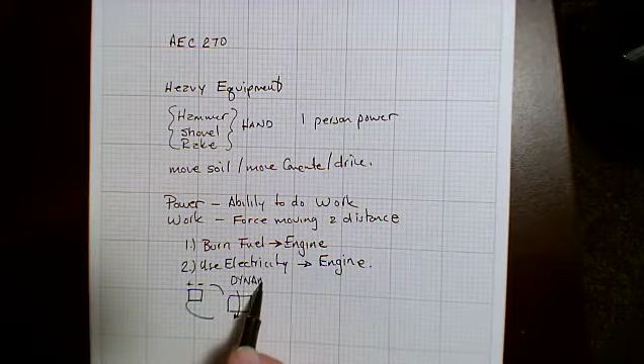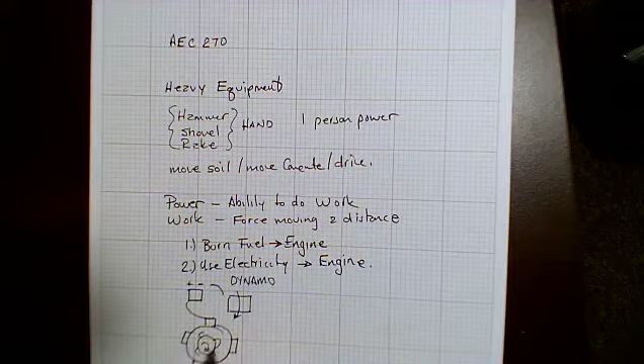We get these two to work, and although we talk a lot about electrical equipment these days and think that it's a new idea, electrical driven equipment has been around for a long time. Many electrical cars took a battery and connected it to a dynamo or a motor, which is a series of magnetic fields that rotate inside fixed magnetic fields and are forced to rotate by the changing current, and we can then drive a shaft.

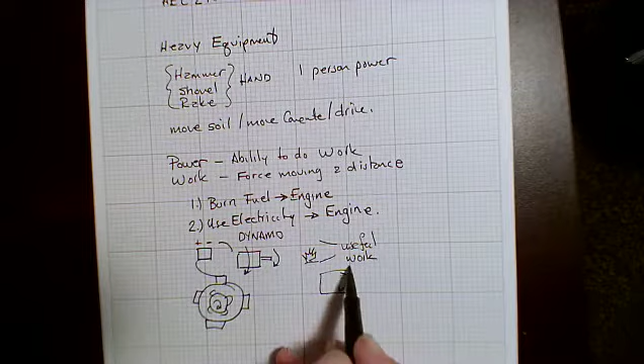Similarly, if we burn fuel, we can then convert that fuel into useful power to turn a motor, whatever that motor looks like, which turns a shaft.

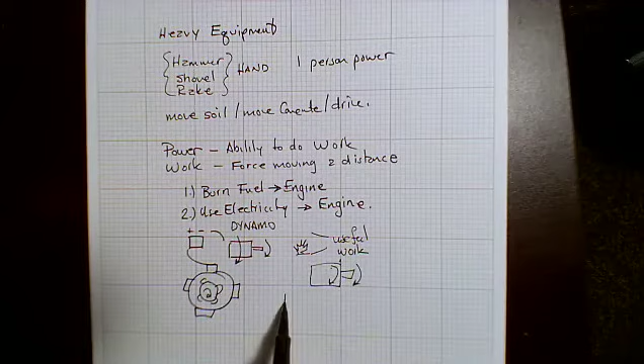Now, we can also use internal and external combustion. In your Suez Canal assignment, they talked about using steam. In steam, we use external combustion. We burn coal or wood or whatever, take that heat, heat water, and use that water to become steam. We take that steam and use it to turn a turbine, and the turbine turns a shaft.

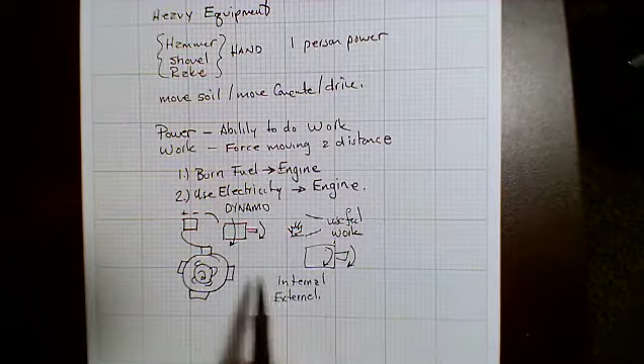In an internal combustion engine, we have a fuel that drives pistons, which turns a crankshaft, and that shaft then rotates. Once we have a rotating shaft, we know how to do all sorts of things with it. We can drive a pump, we can drive wheels, we can drive a pulley or a rack that will wind and unwind a cable. So we can do all sorts of things with this turning shaft, and it has been around for quite some time.

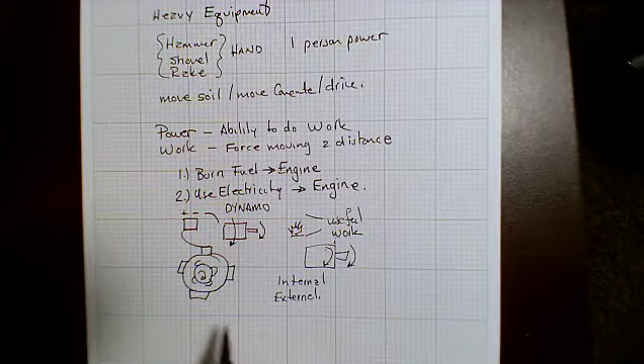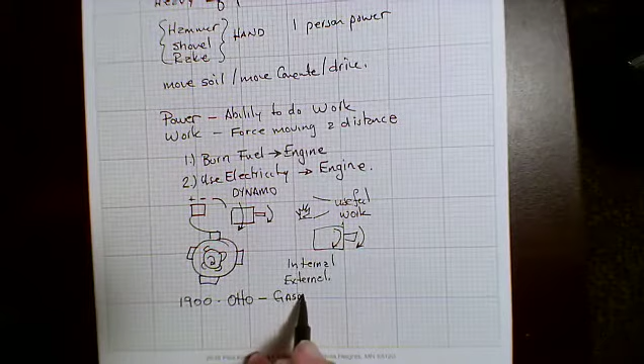In the early 1900s, a gentleman in Germany by the name of Otto developed the gasoline engine, and it was decided that it was too important an invention to simply patent. And so we have gasoline engines that were made widely available nearly simultaneously.

A diesel engine is developed, not surprisingly, by Diesel in Germany. This uses diesel fuel or diesel oil, and it burns that oil in an internal combustion engine, all of which we do to turn a crank.

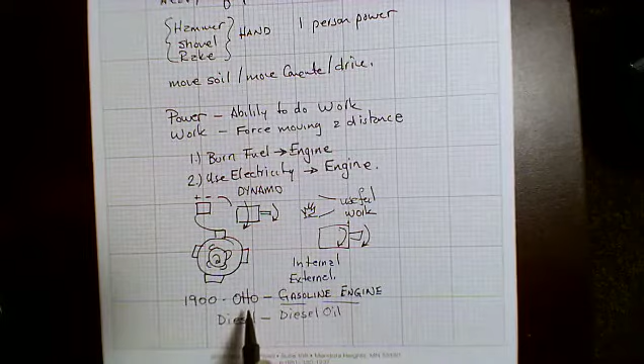At the end of the Second World War, the Eisenhower administration decided that they would build the Interstate Highway System. This was a major expenditure of public funds, and this expenditure required us, as a society, to develop ways of doing construction that were different from what we had done before.

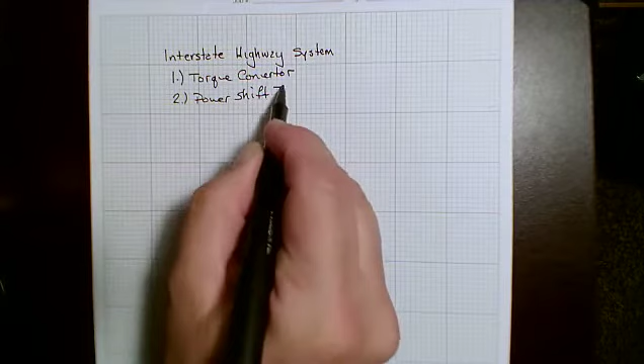We had a number of changes. One is the torque converter, which allowed us to rapidly take power off of a rotating shaft. The second is the power shift transmission, both fortunately developed as a part of making heavy vehicles that could do things during the war.

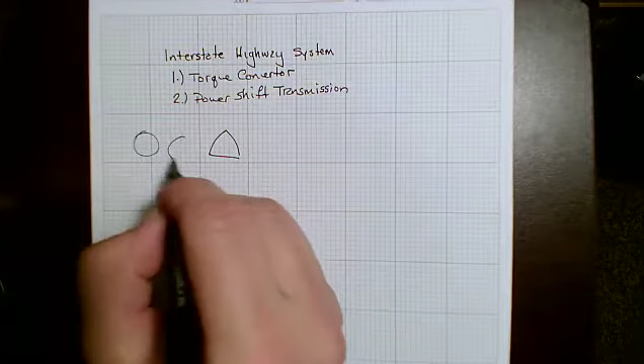These allowed us to have a front end loader, right? So a front end loader, which is something at the front of the vehicle, as opposed to the old dipper shovels, which at the time were the method of using a shovel back and forth. This is much more efficient.

There are three large changes that occur during this time. The first is high strength steel. High strength steel allows us to build lighter vehicles that are just as strong as lower strength steel.

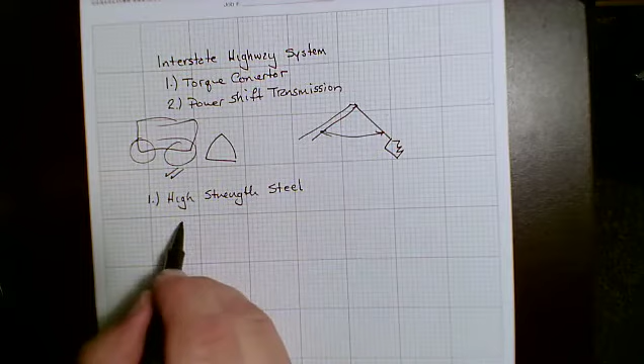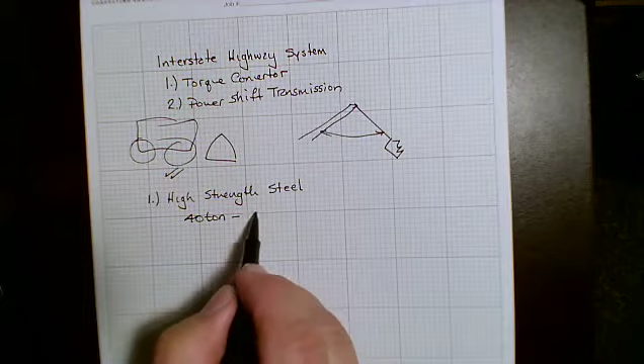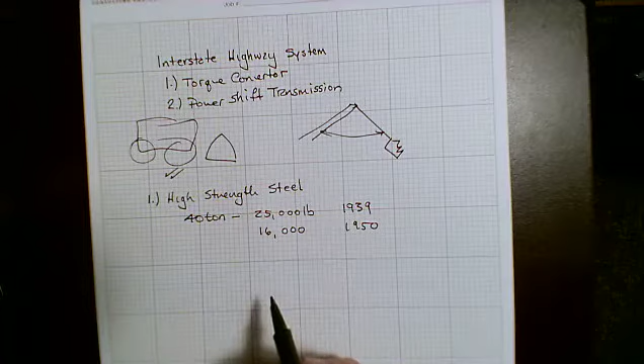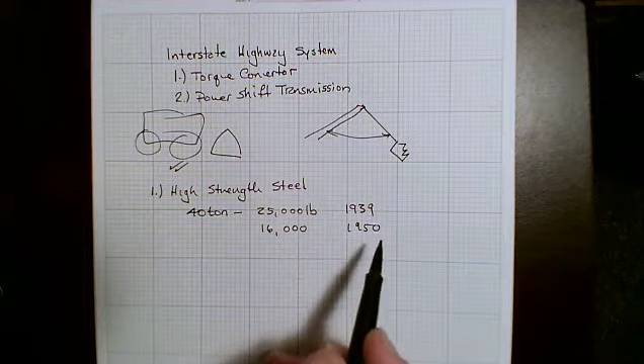As a result, the machines would change, for example, a truck capable of carrying 40 tons of soil in 1939 has a weight of 25,000 pounds. By 1950, the same vehicle, same capacity, has a weight of 16,000 pounds. If you think about the way in which we move things around, this reduction in weight of the vehicle is significant. It means that more power for a given engine is available to move the stuff because you don't need as much to move the vehicle itself.

The second change is nylon corded tires.

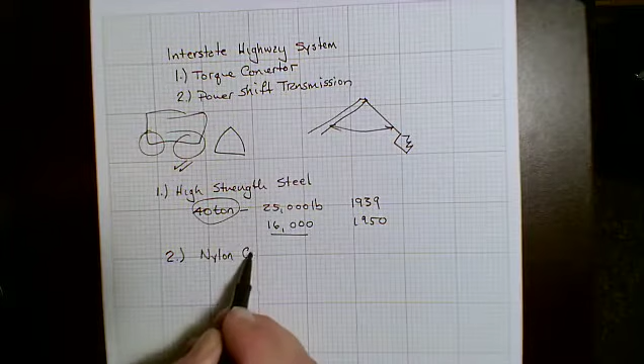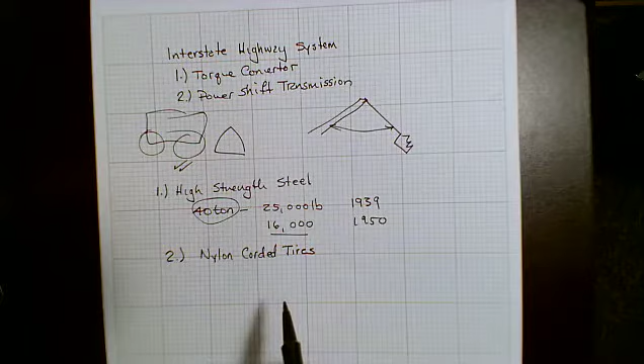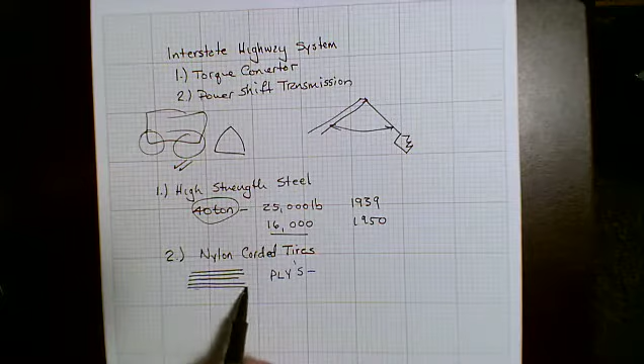Tires are a very important material. We would have a very difficult time if we only used rubber tires, because rubber is very elastic. So what we would do is build many plies, or layers, of rubber into the tire. You've probably heard this in ads, a 5-ply tire is 5 layers.

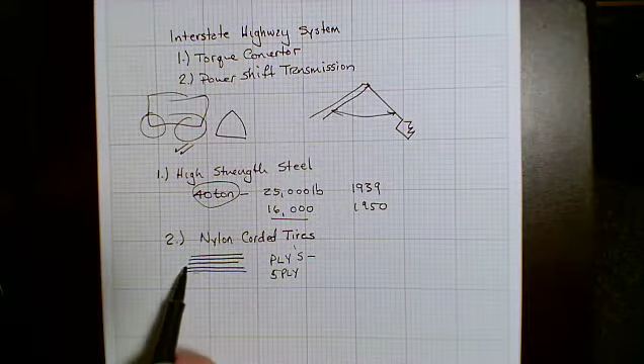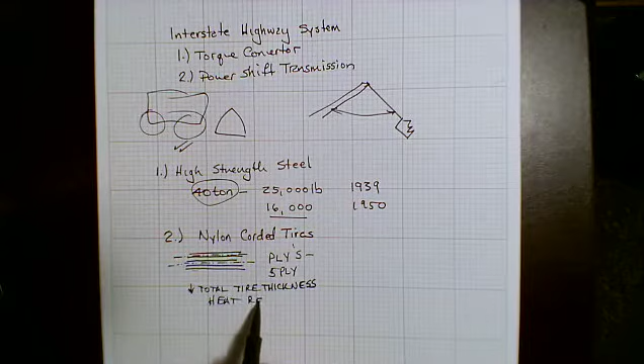What we could do is put in layers of nylon, which was developed as an alternate fiber during the war. We can decrease the total thickness of the tire, and therefore decrease the amount of heat that is developed. So for a given tire, it has considerably less thickness, less carcass, but it is still going to run.

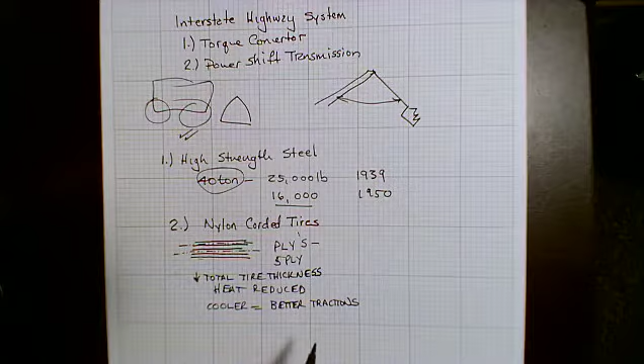If we run cooler tires, we get better traction, so the tires can be used more efficiently. We have lighter tires, which is good. They're much stronger, which is very good. And they run cooler, which means we get better traction.

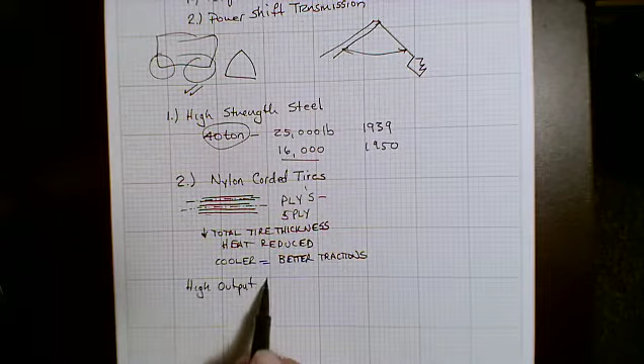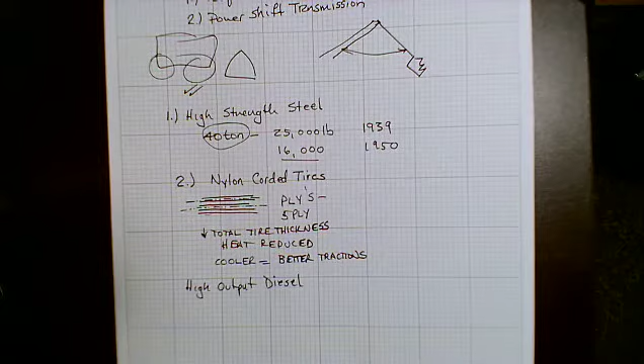Finally, we have high output diesel. Almost all off-road construction vehicles doing work on construction sites today are running diesel engines. The compression can be raised, and some of you may not know the big difference between a diesel engine and a gasoline engine.

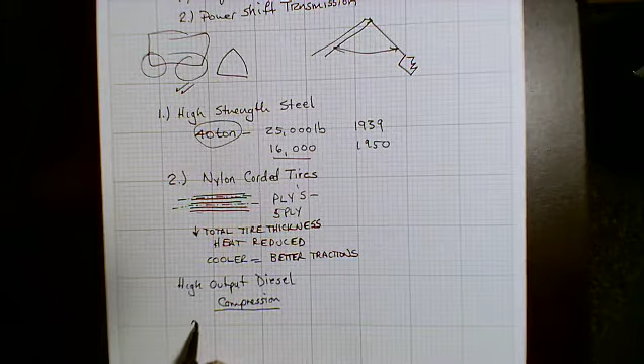And so we should probably talk about what we mean by horsepower, and we'll do that in our next little lecture. But what this allows us to do is increase our flywheel horsepower.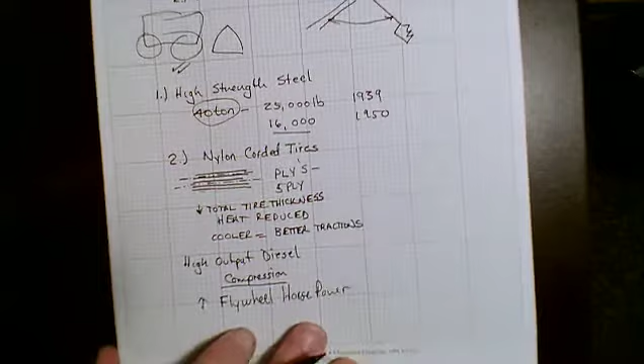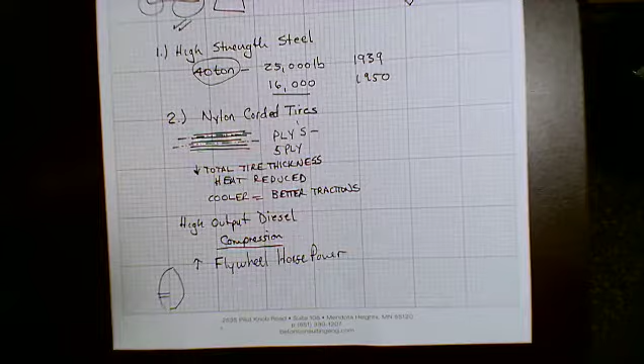If we attach to our rotating shaft a wheel, which is moving, or flying, we have a flywheel. This is a wheel that we're rotating with our shaft, and the torque is what we can take off of this rotating shaft. You can imagine it turning a belt, turning the transmission in your vehicle, or being used to power a pump. All of these things increase our flywheel horsepower.

Over the past century, we've developed machines that can do almost every task you could consider on a construction site. They can dig, they can pump, they can move over level terrain, they can move over unlevel terrain, they can push materials, they can pick up materials, they can deposit them into trucks, and the trucks can haul materials across the soil. In general there are refinements going on, but there's no real new innovation in the machines.

What is happening to us are three things over the next 20 years. The first is the level of control. This is important because more and more these machines are becoming automated.

They're self-controlling, the same way a car that drives on the road, or a self-driving car. You can have these machines that are able to tell you where they are, what they're doing, how much fuel they're consuming, how well their filters are doing, and more importantly, you can download into them the plans. If they know where they are and they can read the plans, then they don't overcut or undercut.

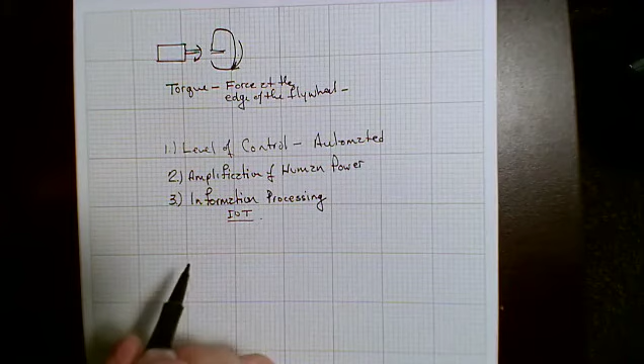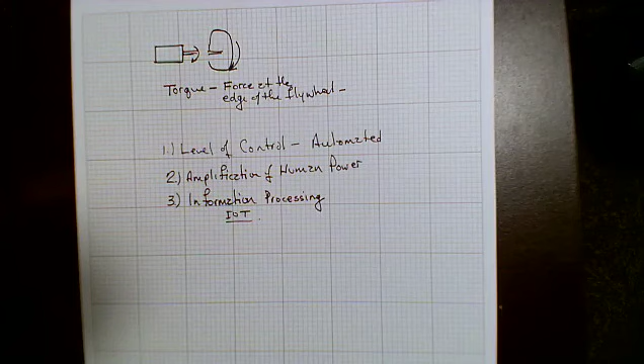All of these things can be monitored, and you've probably heard of it in the Internet of Things. So we can keep track of what our equipment is doing and various other things. The purpose of this course is to teach you the how and why of using equipment in construction. Most construction, other than residential and light commercial, will require amplification of power. So our next lecture is going to talk more about what vehicular power is and how we measure things.